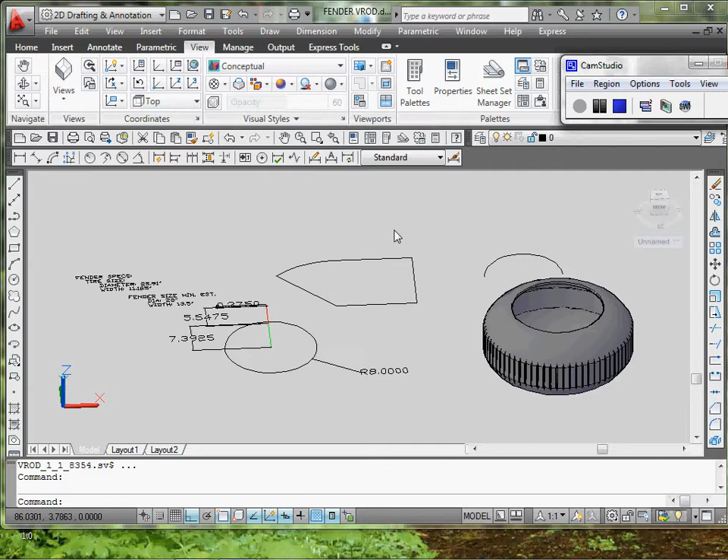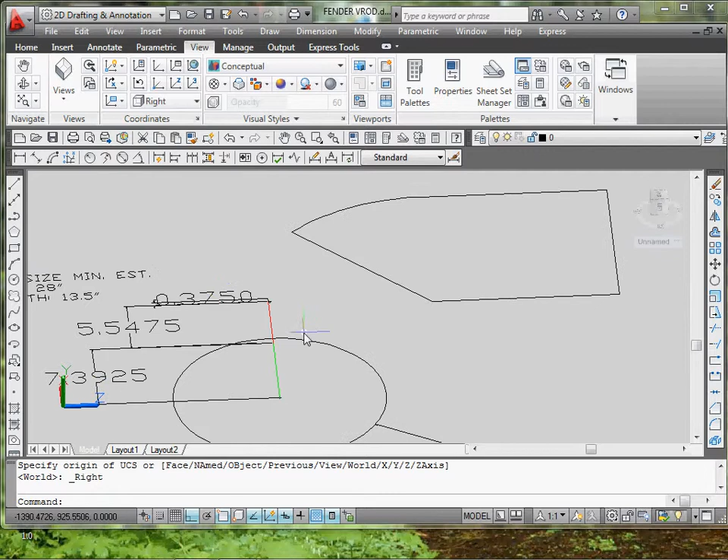Next part is we're going to do the rim. Still recording, good. Alright, basically to do the rim, we're gonna go to left view, or you gotta change your UCS to a left or right view. Actually, you might want a right view. And you're gonna rotate around to get to here.

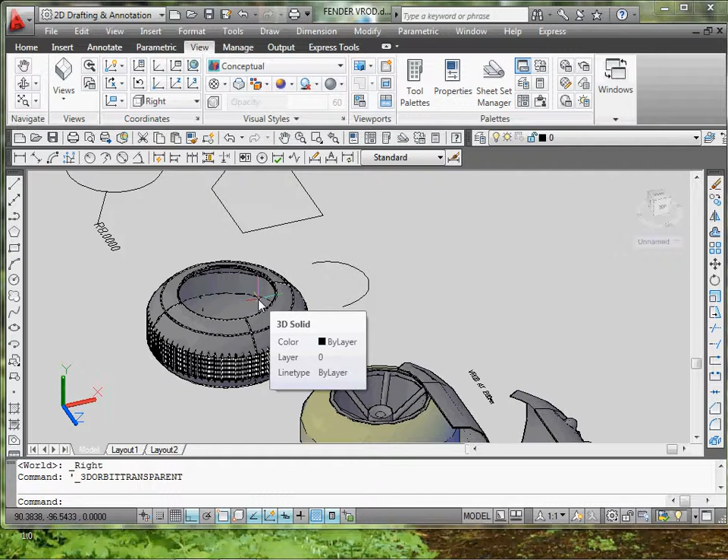Now the circle is our actual rim cutout, so that we can use that as our basic detail of how we should draw the actual flange. The only problem is that we don't know exactly what the thickness of the tire is. So instead of doing it this way, we're going to do it a little bit differently. So what I want you guys to do is go to top view for our UCS.

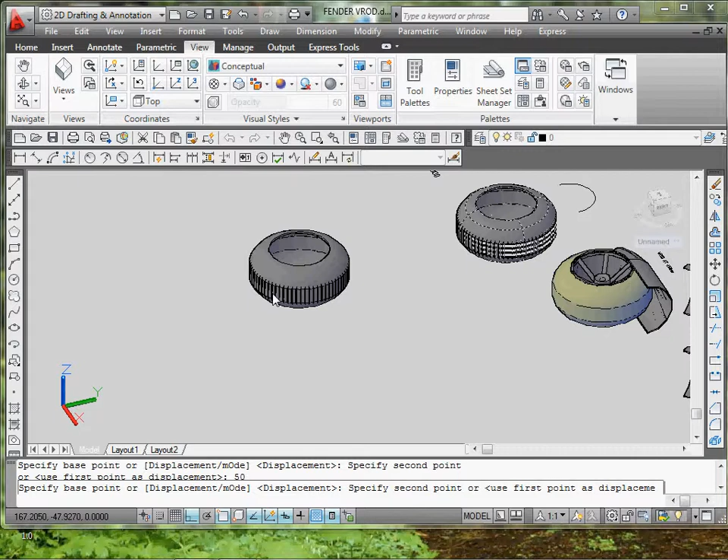We're going to make a copy of our tire again. But make sure you do it at a specified distance, like 50, like we've been doing. So I have it copied 50. Now, hopefully your computer doesn't freeze, so save your work. This is a more detailed tire now. What we're going to do is go back to top view once you've made a copy. So even if you were on top view, you could have made a copy, or you could have went isometric. Doesn't matter.

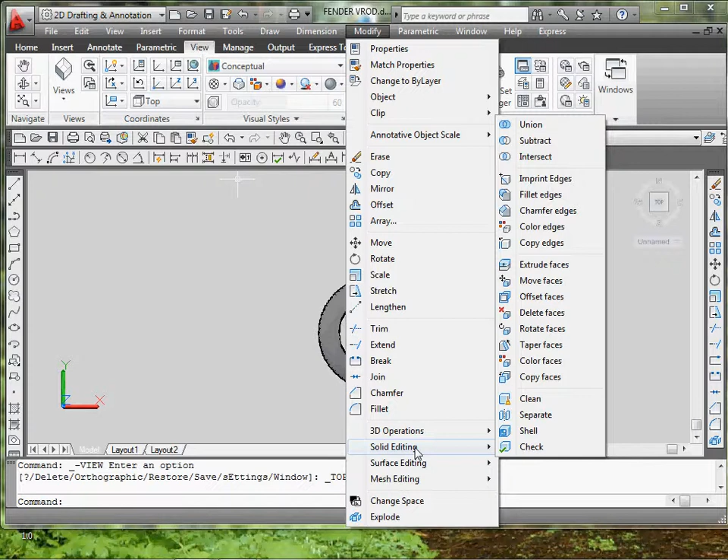But what we need to do is we're going to slice it perfectly in the middle, like so. So using your slice command, which is go to Modify, 3D Operations, Slice, or you can type it in. Just select the tire, enter. You select the middle, make sure you snap onto the middle, and you have ortho on and you go straight up. And you click enter. It's going to cut it right in the middle.

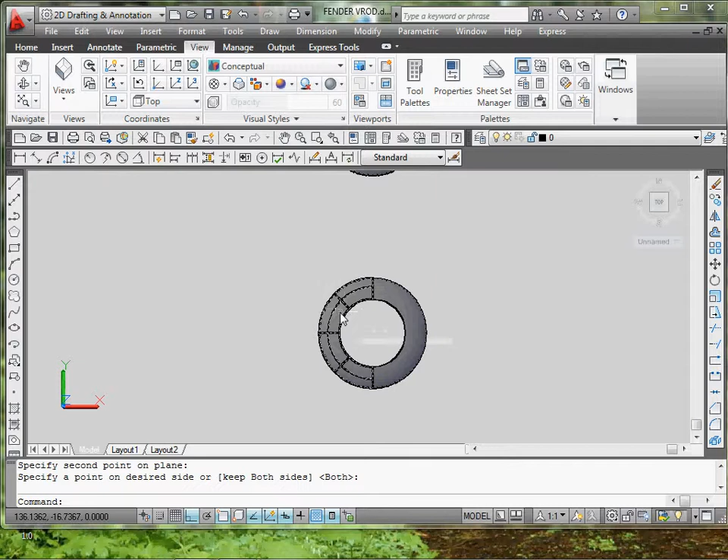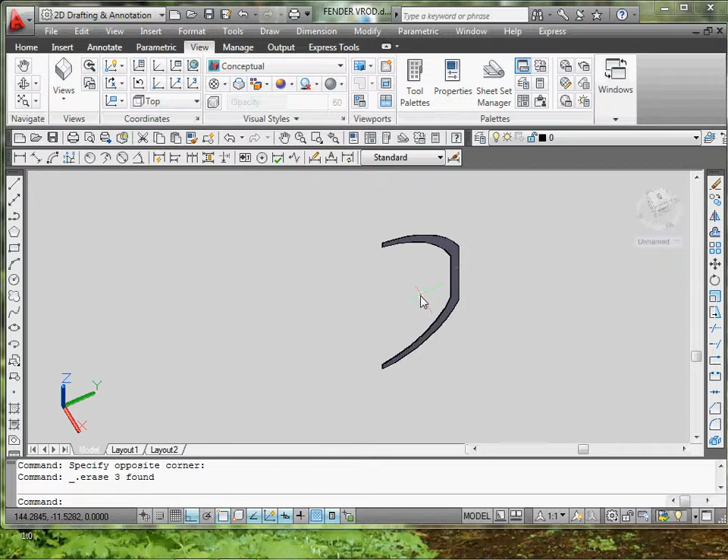What you're going to do next is you're going to delete one half of that tire, and you're going to explode the other half. So I deleted one part, I exploded the other, and I'm going to remove this so I can get the isometric view, the side cut of the tire. So delete these extra pieces over here. Oh my god, so many pieces. You just do a blue box and delete it. You end up with a cut of your tire, just like a slice, which is what you want.

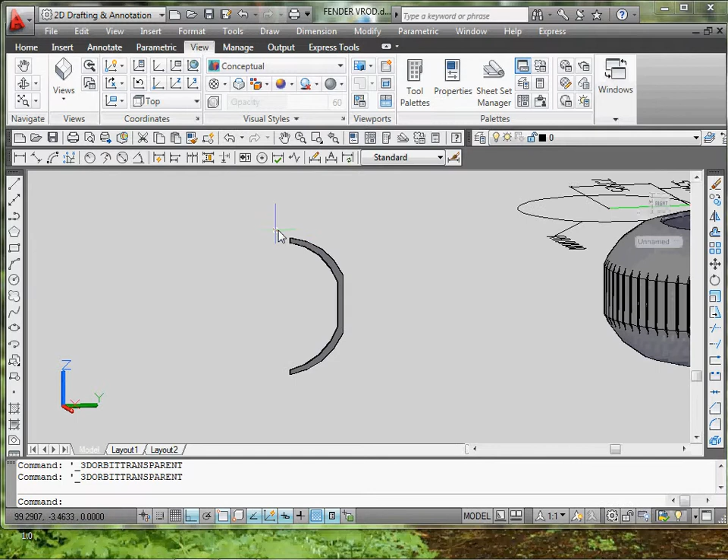There is another option if you have the newer version of AutoCAD. You can use Flatshot to do a cut, or you can do a surface cut, but I don't think it will work on this one because it's solid. So this is your easiest bet. It always works, you don't have to worry about it. So again, I cut it, exploded it, removed everything except this piece. Yes, question. So the next step we need to actually draw it out.

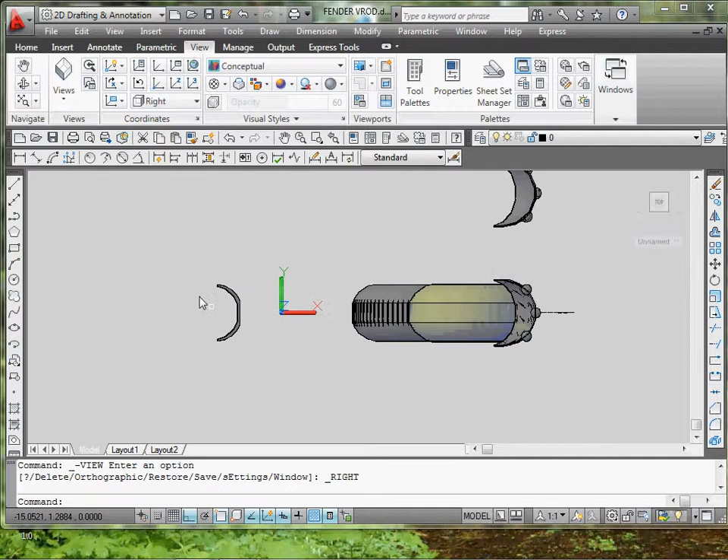What we want to do is go into an isometric side view of this. So your right view or left view, that's fine. If you guys can't see it, go back to your view and move it over somewhere so you can see it. At this point, I'm not going to rotate it because it's going to cause issues with the drawing. So I'm just going to leave it as it is. Still recording. And you can explode it again. Actually, that would leave it without the actual solid piece, the surface piece in there.

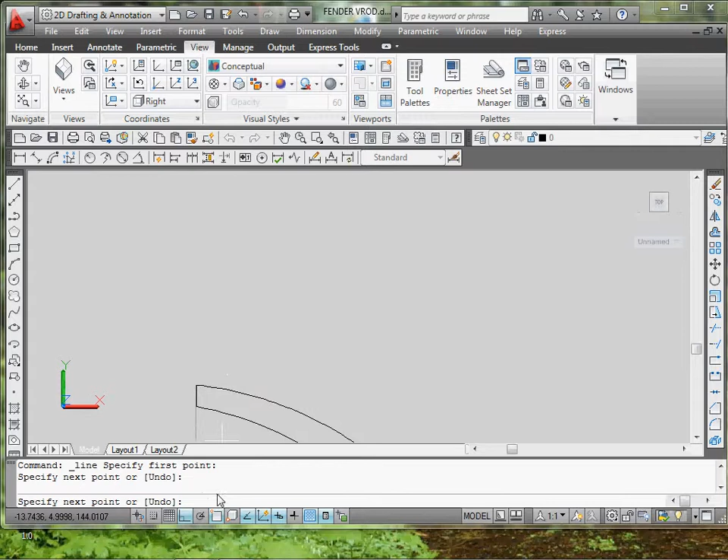And what you need to do is just draw a design that will hold. So I'm going to actually use polar. If you guys remember how to use polar, turn that on, and right click to set a setting. I like 45 degrees. I'm going to use that. 45. My distance will be 0.25. So I'm going to do a 0.25 thickness piece of metal. So as I go around,

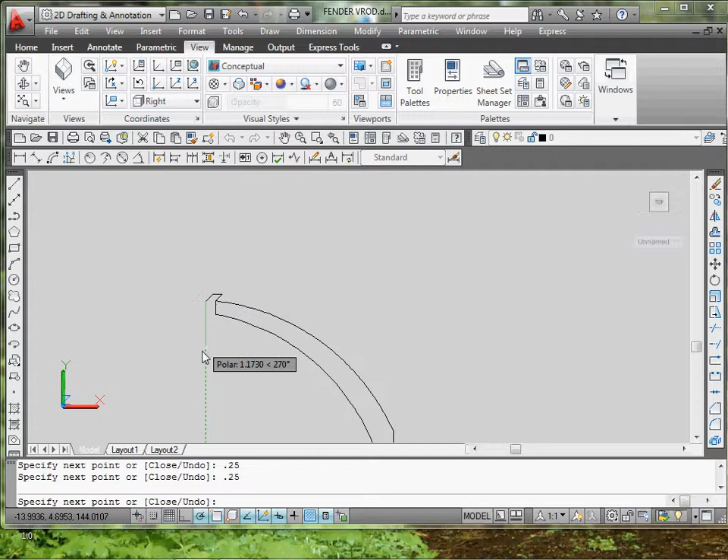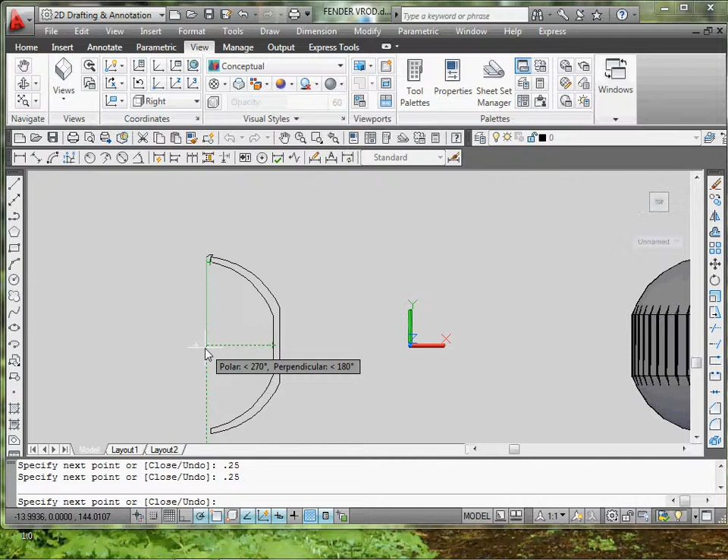if anybody doesn't know this skill, I want to draw just the half so I can mirror it. I don't have to draw both sides. So what I'm going to do is go down, move over to where I think the middle is, the midpoint, and move over. You can see a green line. That's the newest version. You guys probably have a gray line. But that will let me snap it exactly at the midpoint without drawing additional lines and deleting them. So that's my middle.

Again, I'm going to draw one more line from here down. Now I can just match up with this one, just move it over, and it should snap into position. Like so, and I can close it up. Alright, actually I shouldn't close it up.

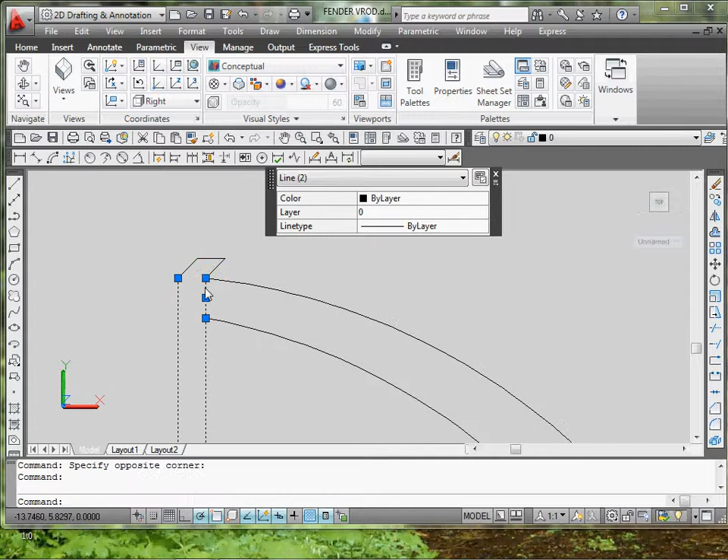So I have this piece right here. What I need to do is select this whole piece, including this and these two, and just mirror it over. Using mirror, it's going to mirror it from this. Make sure your ortho is on, or you can use polar, but make sure it's 90 degrees. You get something like this.

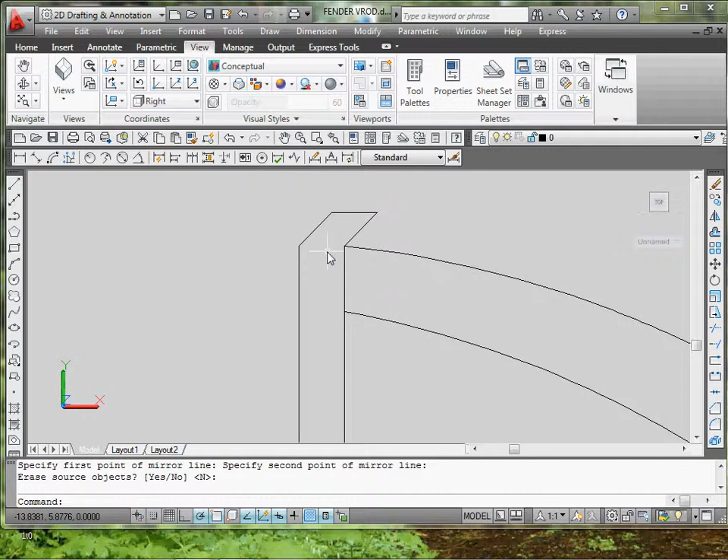So that's my actual clip. You can also add a piece here that holds it from both sides of the tire. It's really up to you. If you want to be more professional, then go ahead and do that. Or you can redesign this. It doesn't have to look like this. But here's the concept of how you do it.

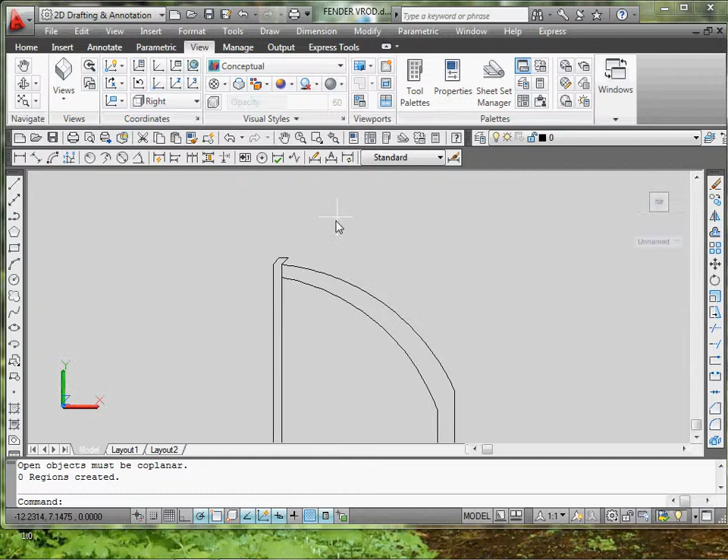After you have it drawn out, what I recommend you can do is use region. You select that piece that you just drew. That didn't work. So I'm gonna move this over so it doesn't interfere with my work. I'm gonna move it over 5.

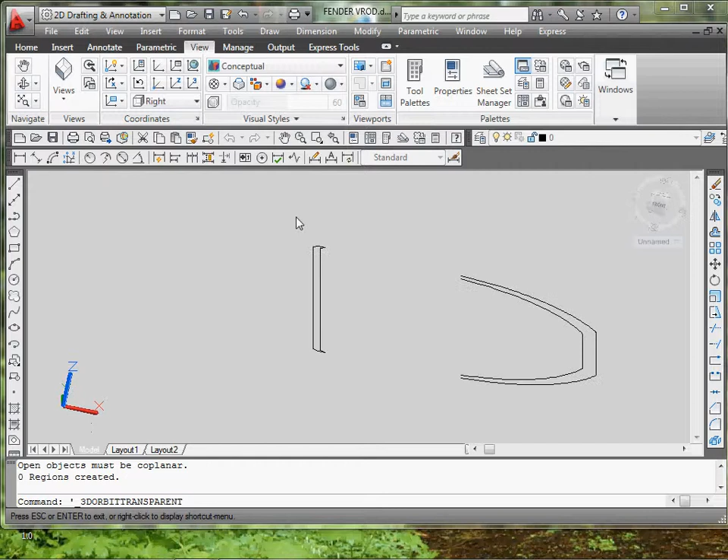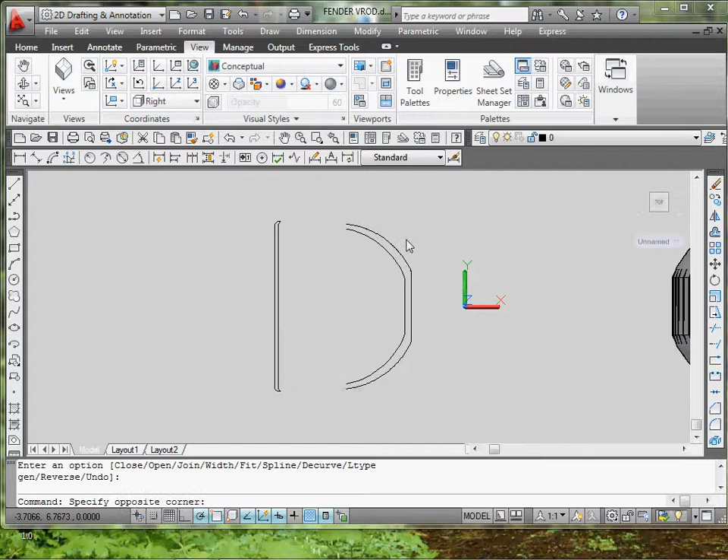No big deal. What we can do is just type in p-edit, polyline edit. So type in p-edit, enter, M for multiple, select this whole multiple, yes, J for join, enter, enter. And it's one piece. I can move this back 5, and I have that piece.

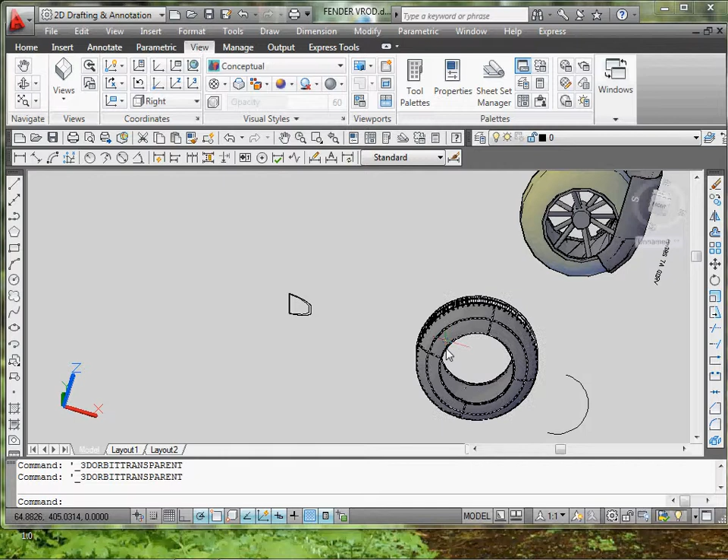Now the next step is I'm going to have to revolve this piece around, just like I did with this and everything else. The only problem is I don't know where the center is. The good part is that I know I copied this 50 away, so all I have to do is go to line from the center of this. So I'm going to ortho, go 50. So that's my center of that donut tire.

Yes, question. So the next step would be, once you have the center of the tire, just revolve. So you go to, oh, before you do that, you got to change your UCS to be top. Oops, your UCS to be top.

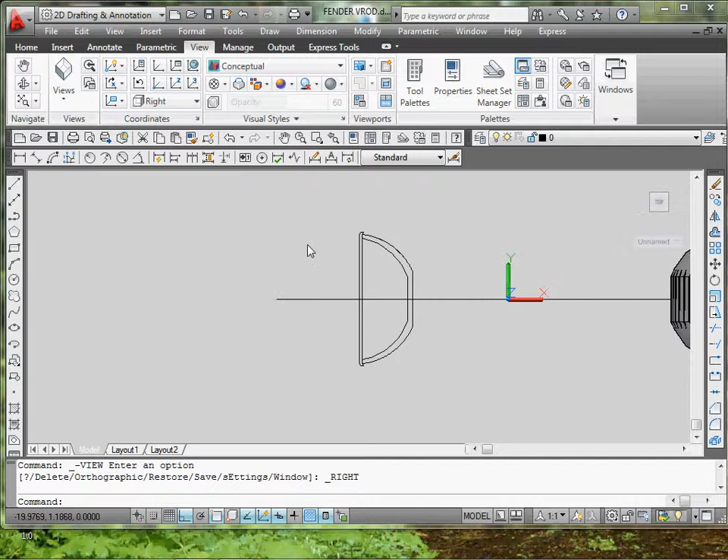View. There we go. And what you want to do is rotate it around so you guys can see better. And what I need to do is, oh yeah, Z is in the wrong direction, that should be up, so I can just change that to be top view. And I go to revolve, select this part I just made, and that's my revolving axis.

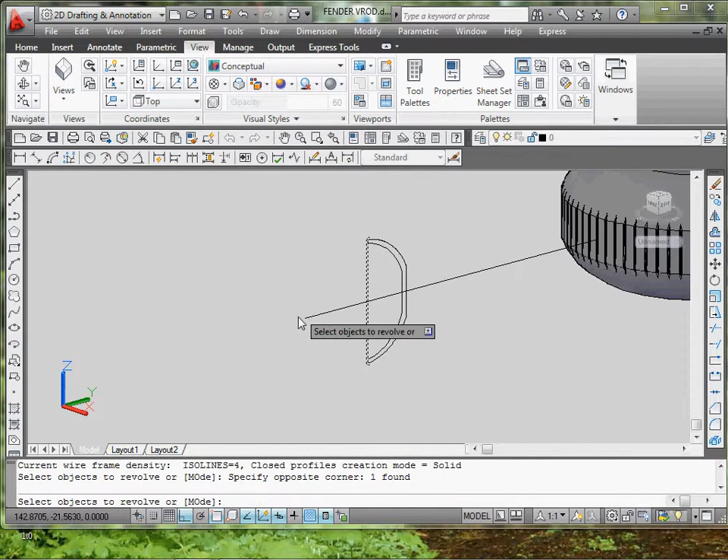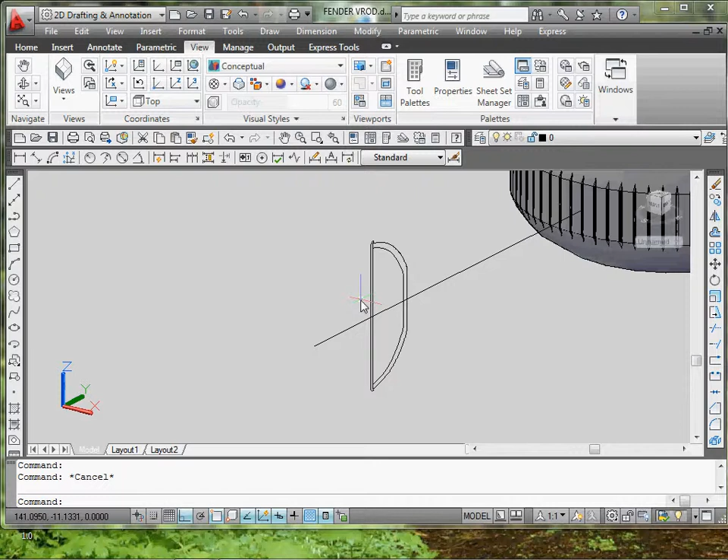Oops, for some reason it's not doing it. Let's see if we can select that. In case you can't revolve this for some reason, there might be an issue with the actual 2D drawing. You can check if it's just the revolve command by doing extrude, and if extrude doesn't work, which it's not working, then your 2D drawing has an issue with it.

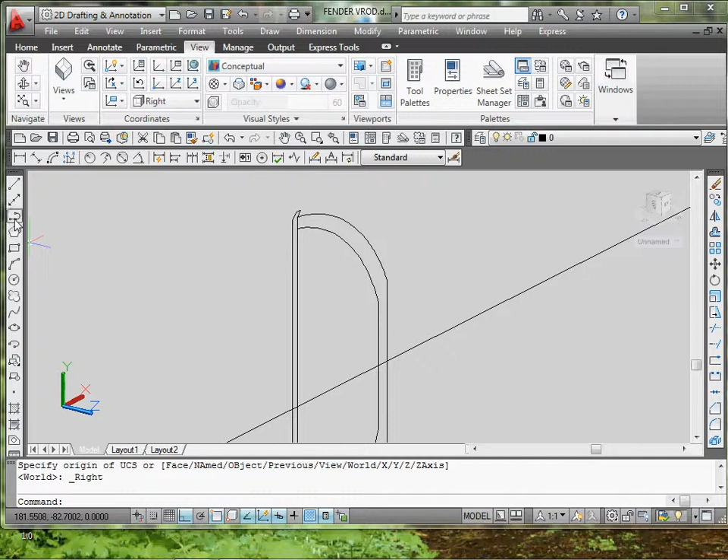Now there's an easy way to fix this one because it's such a simple drawing. It has only straight lines. What you can do is go back, change to a right view, and just trace it over with the polyline. Now it's best that you change your color so you guys can see which one is the new one and which was the old polyline setup. So I'm just going to draw that, trace it over.

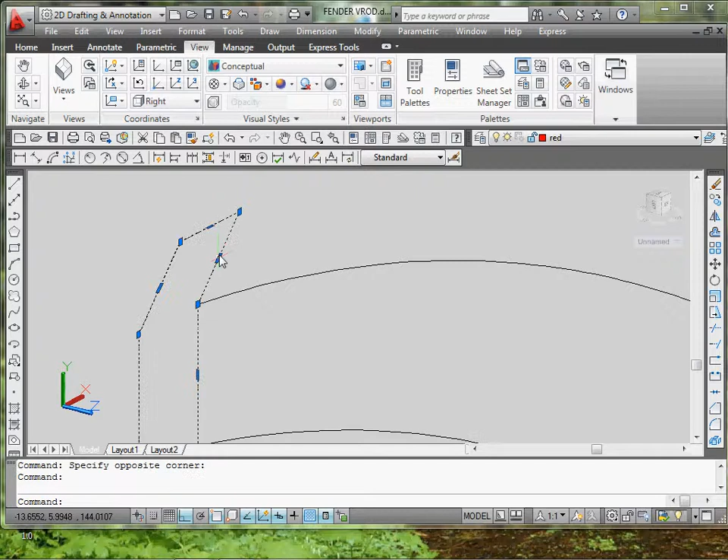Like that, I'm going to delete the black one. I got my red one ready to go. Just got to go to revolve. Enter, select that piece, there we go, and revolve around.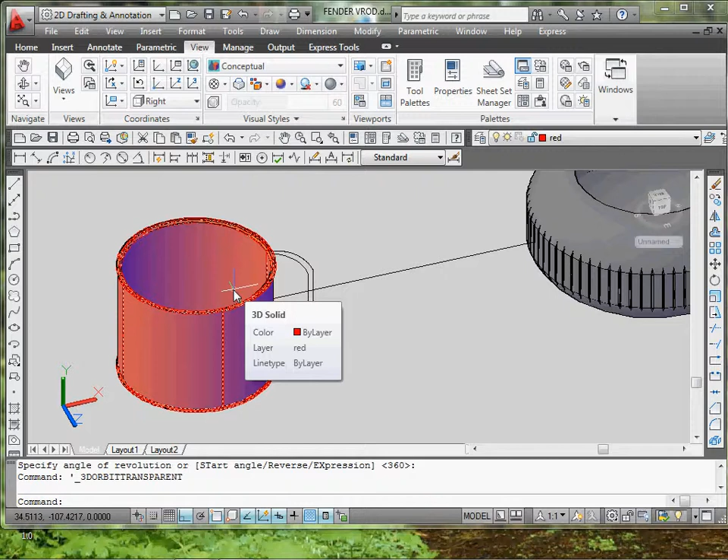So that's my actual rim body, and then I just have to add in the hub and the spokes. That is up to you guys to design, I'm not going to show you how to do that. It's a simple thing, you guys can handle that. If not, you can just raise your hands and I'll help you guys out.